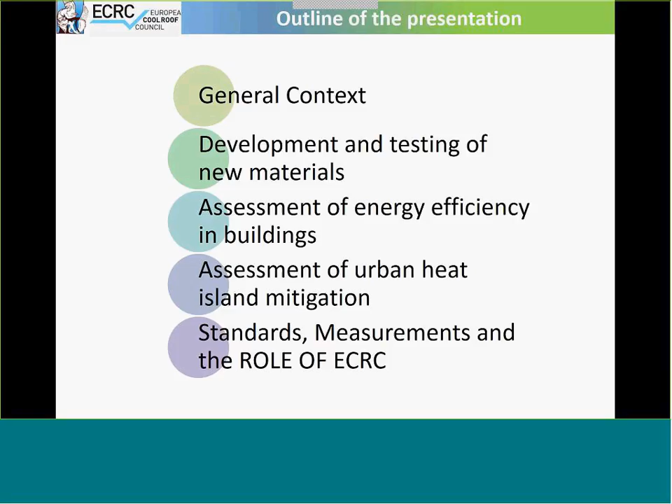So today's topic is an introduction to cool roofs and cool materials in Europe, and the role of the European Cool Roof Council. The outline of the presentation includes a general context, the development and testing of new materials, assessment of energy efficiency in buildings, assessment of urban heat island mitigation, standards and measurements, and how ECRC can contribute to that, which gives the floor also to Afroditi Synnefa, who is going to talk more on this.

In terms of the general context, according to the European Commission, buildings are responsible for 40% of the energy consumption and 36% of CO2 emissions in the European Union. By improving the energy efficiency in buildings, we could reduce the total EU energy consumption by 5 to 6% and lower CO2 emissions by about 5%, and this represents one of the major challenges for Europe today. Cool roofs can help the EU effectively address this.

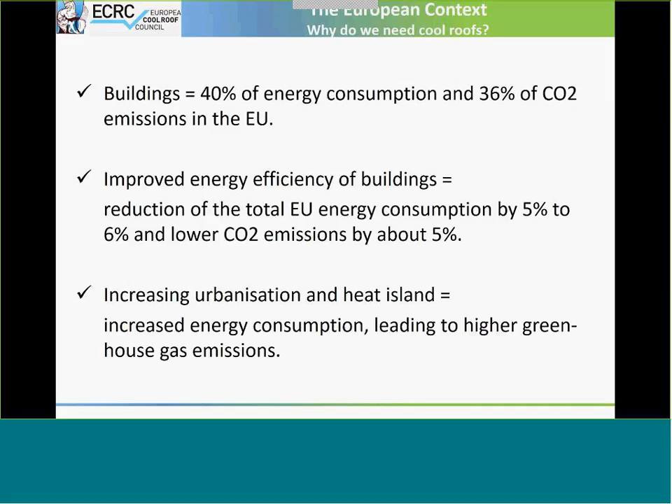We are also witnessing increased urbanization, the so-called urban heat island, which contributes to increased energy consumption, leading to higher greenhouse gas emissions and discomfort for Europeans. So what are the major challenges? Climate change patterns worldwide signal the imminent threat of climate change.

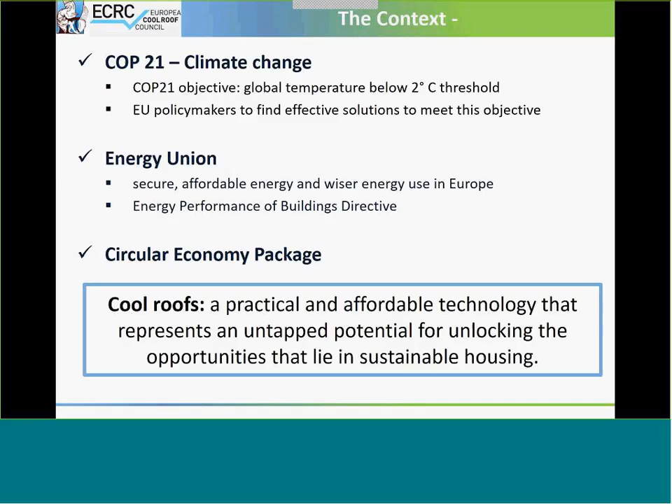In December 2015, leaders in Paris confirmed this by agreeing to take immediate action to prevent it, which is the COP21 objective of keeping global temperature well below the 2 degrees centigrade threshold. The European Union needs urgent and large-scale action to ease the low-carbon transition, and this can be supported by various EU legislative schemes such as the Energy Union and the circular economy, and cool roofs can be a practical and affordable technology that represents an untapped potential for unlocking opportunities in sustainable housing.

So what are the benefits of cool roofs? We would like to mention them again. They improve energy efficiency due to the reduction of building heat gain. They improve thermal comfort conditions in non-air conditioning buildings, and they improve the lifespan of materials. It's also a cost-effective solution that can be used in new and existing buildings.

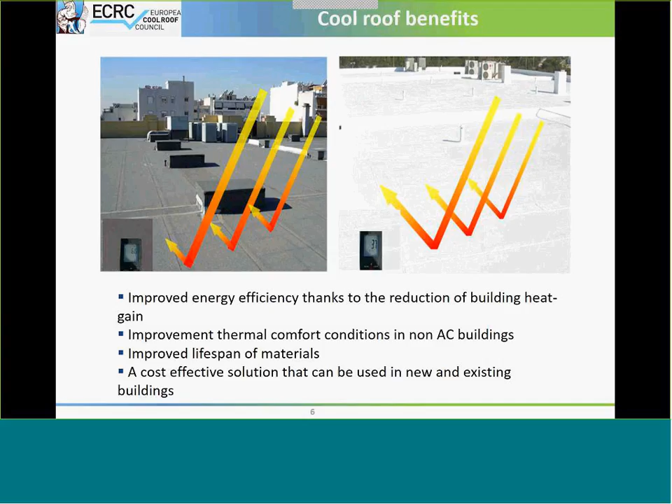Cool roofs can save over time on summertime air conditioning expenditures in conditioned buildings, and the air conditioning savings can be on average 10 to 40%, and they also contribute to the reduction of peak electricity demand and related financial savings.

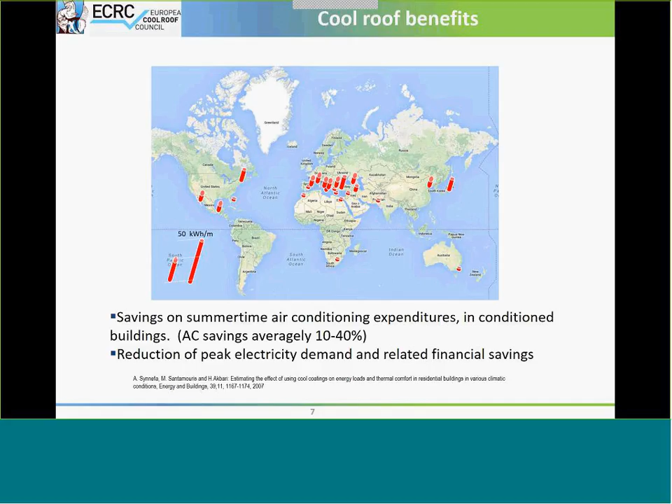Moreover, they improve the life expectancy of the roof system and reduce maintenance needs by reducing the thermal fatigue of the roof. We see here that for a reference building, the surface temperature fluctuates by 22 degrees, while for cool roofs the surface temperature fluctuates by 8 degrees.

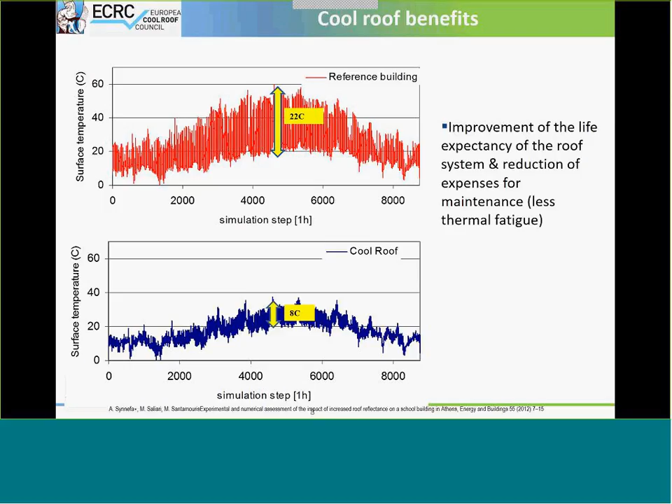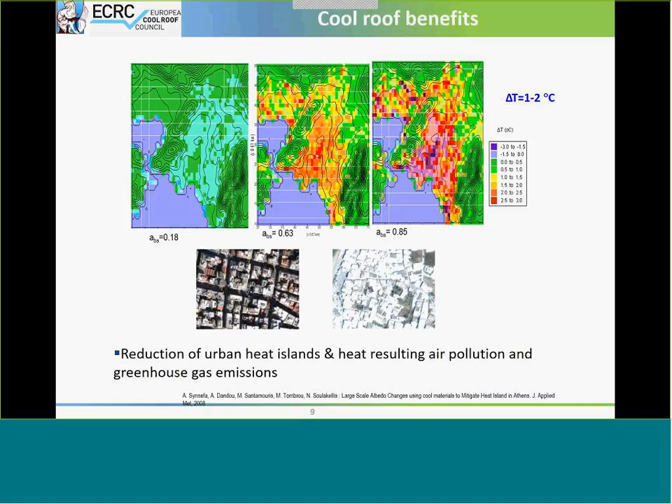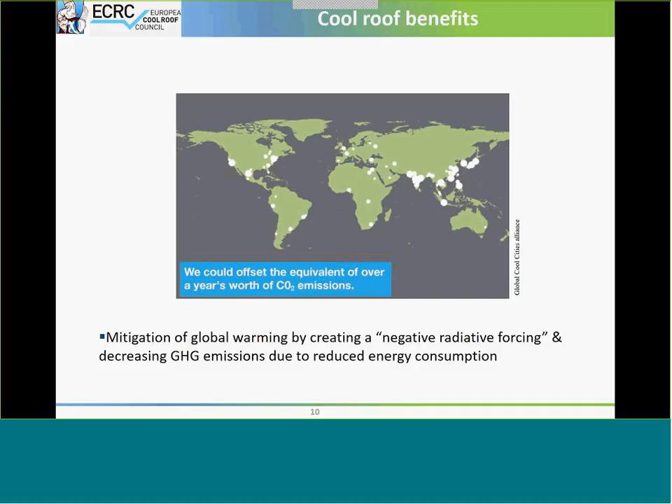Also, it contributes to the reduction of urban heat islands and heat-resulting air pollution and greenhouse gas emissions by minimizing the heat emitted by cities to the sky, and also mitigates global warming by creating a negative radiative forcing impact by decreasing greenhouse gas emissions due to reduced energy consumption.

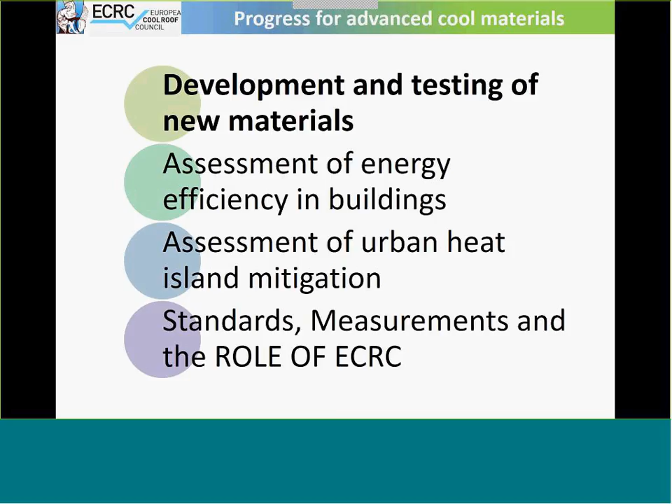So if we look at the progress for advanced cool materials, we have a development of new materials where significant effort is put into intelligent coatings and materials that provide a desired response to some external stimulus such as temperature, light, etc., and also into understanding the aging of such materials.

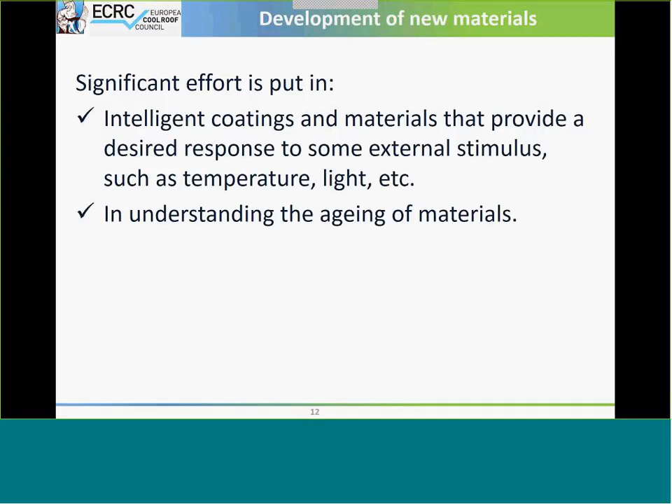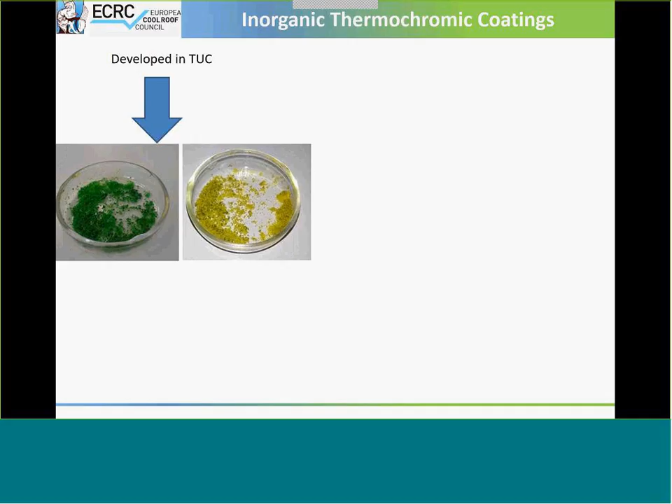We see here some thermochromic coatings developed at the Technical University of Crete, where it has the ability to change color based on the temperature. And we see here the transition temperature of these materials. This is the transition temperature, 45 degrees, which is very close to the surface temperature of cool roofs and cool materials.

And also we have thermochromic coatings with various filters, developed also by the Technical University of Crete. And we see some results of the aging of cool materials, where in existing applications we see in the bottom here.

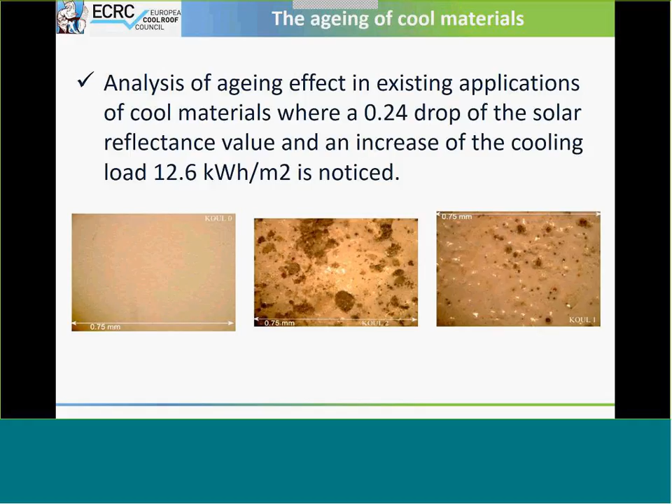We see the cool material as it exists in the initial application, while in the next two icons we see the cool materials after aging, and we measure that there is at least a 0.24 drop in the solar reflectance, and this contributes to an increase in the cooling load of 12.6 kilowatt-hours per square meter compared to the initial characterization of the cool materials. So we need to understand how these materials operate over time.

Also, we performed some microbiological analysis to see what kind of bacteria can be concentrated around the cool materials. And we see here the bacteria and fungi at 22 degrees for new and aged cool materials, respectively.

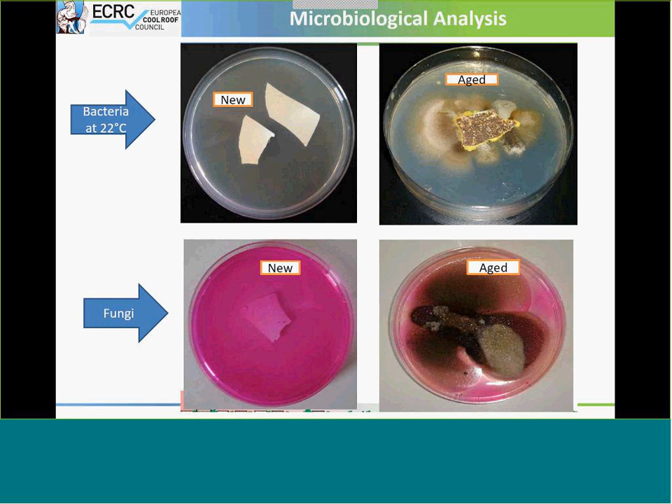So, about the assessment of energy efficiency in buildings, we have various applications around Europe showing that cool materials can contribute not only in southern Europe, which has hot climatic conditions, but also in temperate climates, for example in the Netherlands.

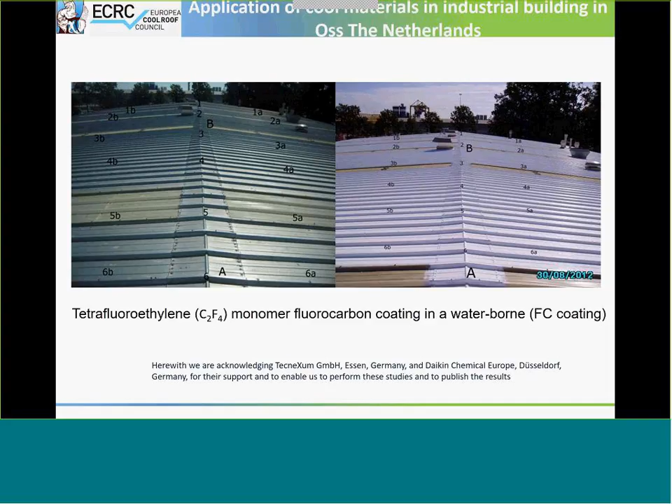We have here the application of a cool roof coating on a roof in an industrial building in Oss, Netherlands, where we see in two pictures the various points where we measured the surface temperature, and the instrument that we used to measure the solar reflectance and the albedo of the surface.

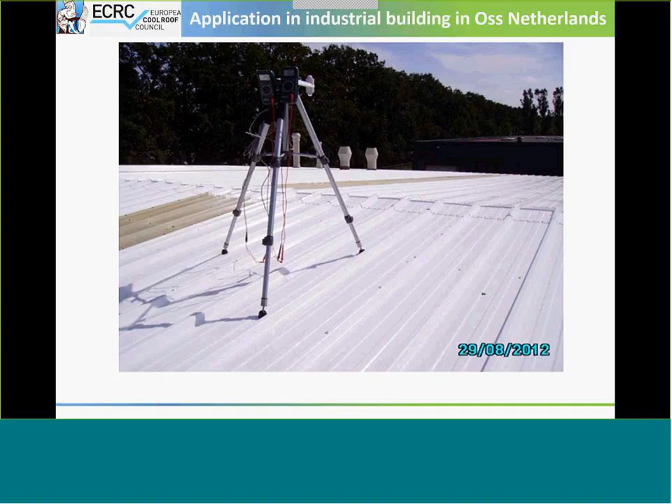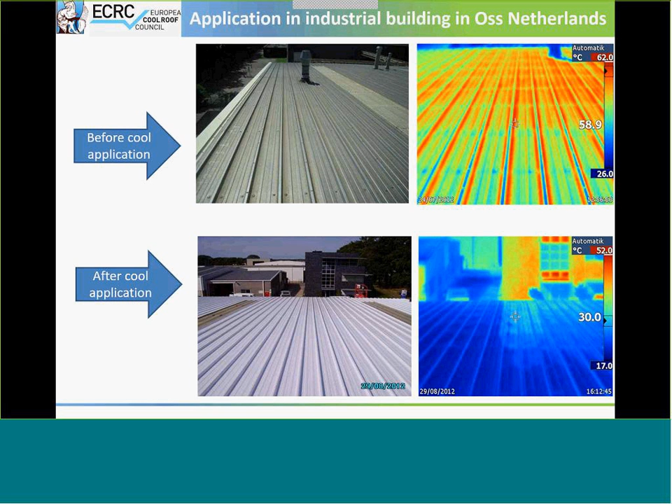Here we have the infrared images using a FLIR camera before and after cool roof application, where we see that the surface temperature of the roof can be at least 58 degrees before, while after the cool roof application, the surface temperature is 30 degrees. We have a significant reduction of the surface temperature of the roof.

So with this, we see an increase of 120% of the roof albedo by using cool roofs, and a decrease of 73% for cooling, while there is a minor heating penalty. This study shows that cool materials can be a viable solution for temperate climatic conditions and for industrial buildings, where there's usually a significant burden in the cooling load due to machinery and production lines. This application of cool materials can make a significant difference in the use of air conditioning, especially in mid-seasons.

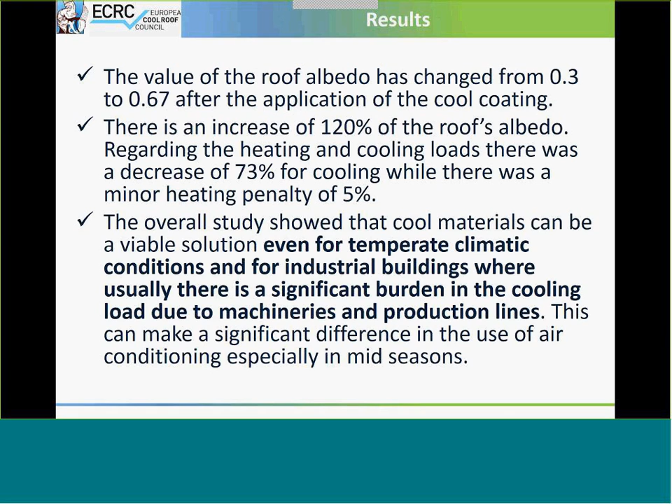Now, if we look at the assessment of urban heat island mitigation, there are various studies around Europe showing how cool materials or cool pavements can reduce urban heat. There are such applications in Serres, Florina, Agrinio, Archanes, Greece, and also a case study in the region of Nantes, France. In all case studies in various areas, we have a surface temperature decrease of around 5 degrees, and a contribution to a reduction of greenhouse gas emissions of almost 7 kilograms per square meter of cool materials.

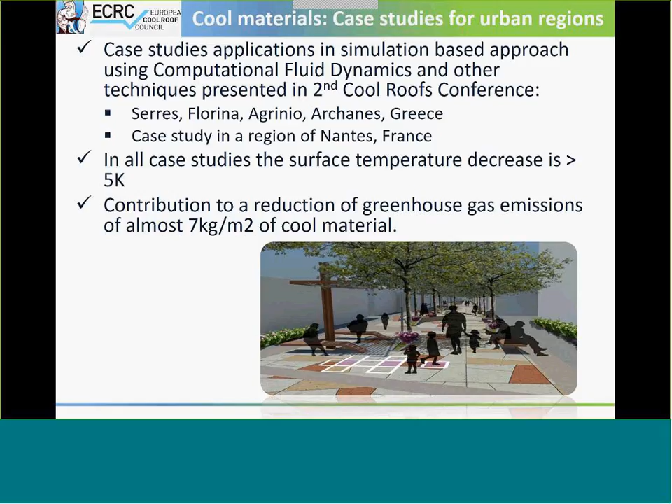We see here the difference in various points in the air temperature before and after cool roof application, where we have an air temperature difference of almost 1.5 to 2 degrees depending on the extent of application of cool materials.

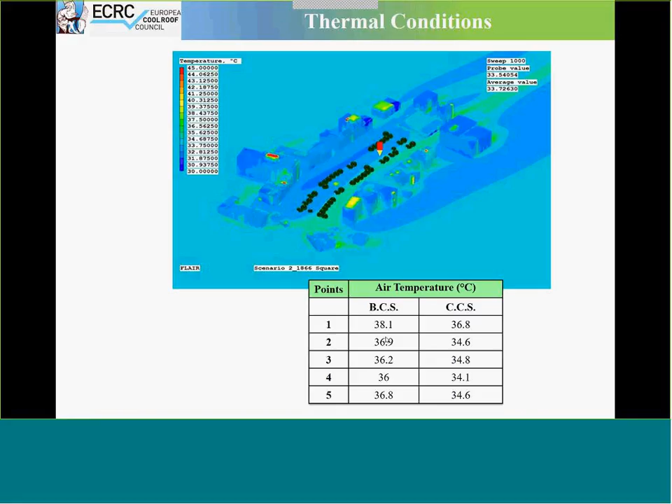Now, what is ECRC's role in this? ECRC was founded in 2011. We started our work in 2011-2012, and in 2014 we released a product rating scheme, a way of evaluating cool roof products.

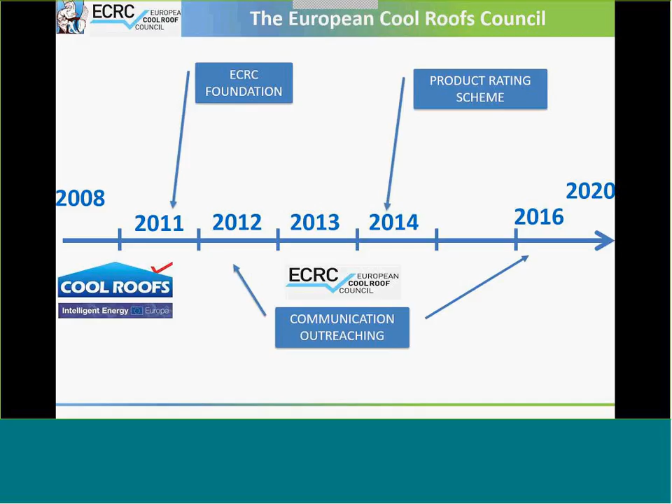This evaluates cool roof products versus their two main characteristics, which are solar reflectance and infrared emittance.

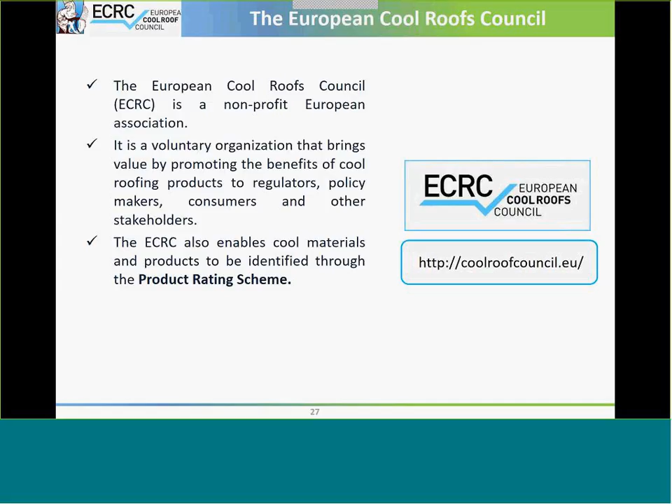So the European Cool Roof Council is a non-profit organization. It's a voluntary organization that brings value to its members by providing cool roof product information to regulators, policymakers, consumers, and other stakeholders, and provides this product rating scheme, which is going to be discussed further by Afroditi Synnefa.

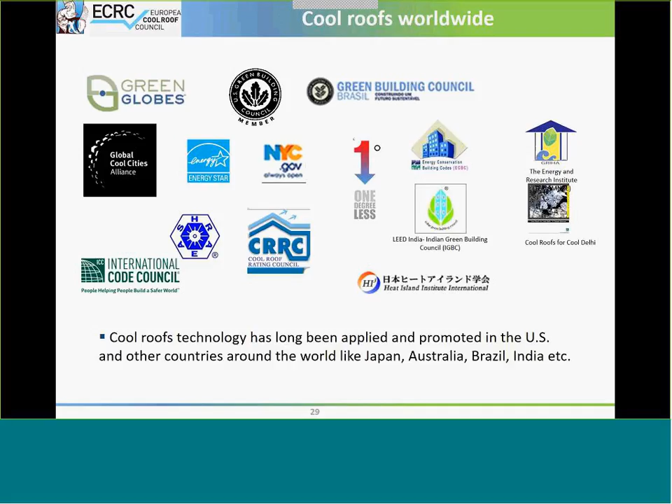There is a list of the current ECRC members. This provides a significant boost around Europe, but is also collaborating with other organizations worldwide, such as the US, Japan, Australia, Brazil, and India. We have three main objectives: to formulate this product rating program, which is already done; to include cool materials in European standards and energy assessment methods; and to promote the benefits of cool materials to stakeholders.

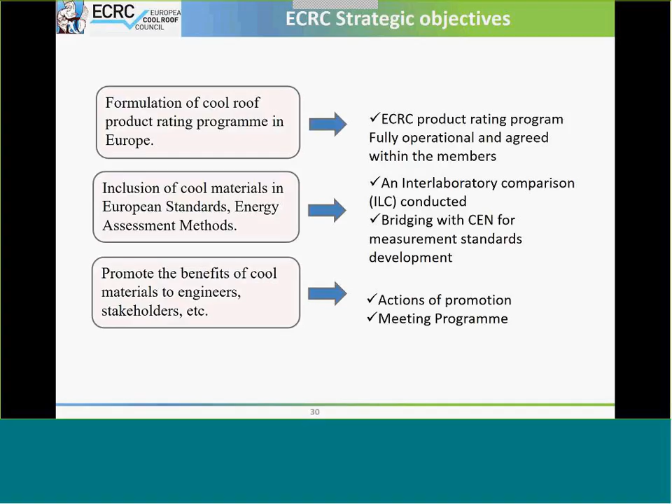So we created a uniform and credible system for rating and reporting these properties of roofing materials, which are the solar reflectance and infrared emittance, determined and verified through testing by European Cool Roof Council approved laboratories and a process of random testing of the various rated products among the various laboratories.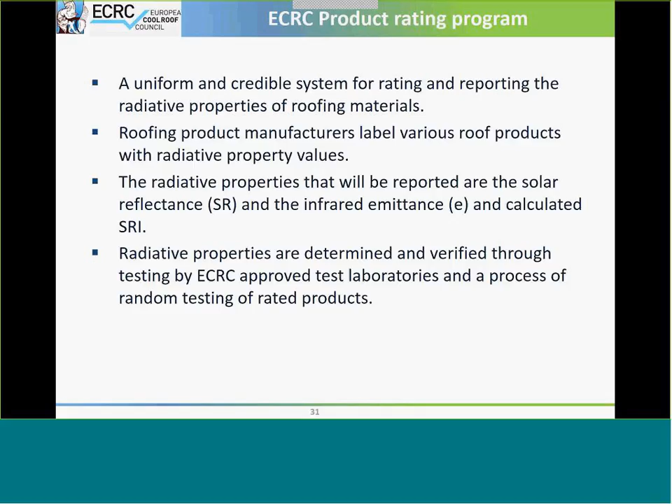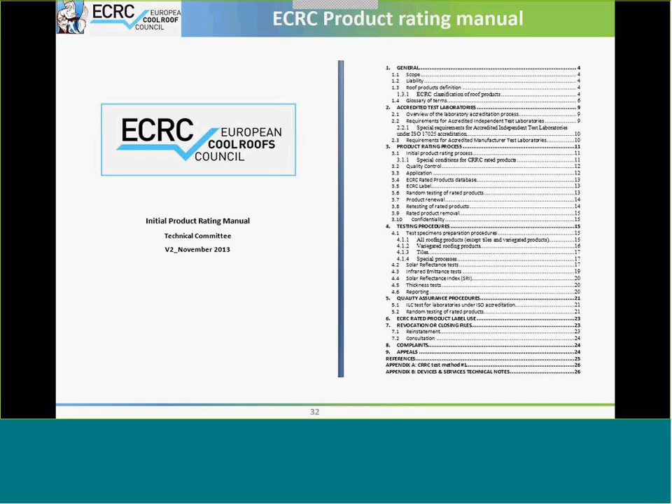This is an example of the first page of the product rating manual, which has also been updated now. There are some changes in the various texts, not significant changes, but there is continuous updating of this manual. We are also trying to perform work on weathering and aging of these cool materials.

by identifying the climatic conditions in Europe that can be representative for the application of cool materials. We have identified three different climatic regions representing the anticipated cool roof market in Europe: the Mediterranean, the center of Europe, and the temperate and oceanic climates, meaning the oceanic climatic zone of the UK and Atlantic region.

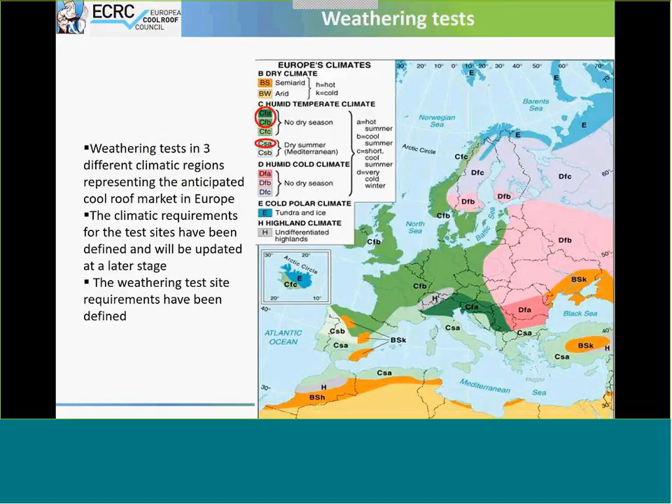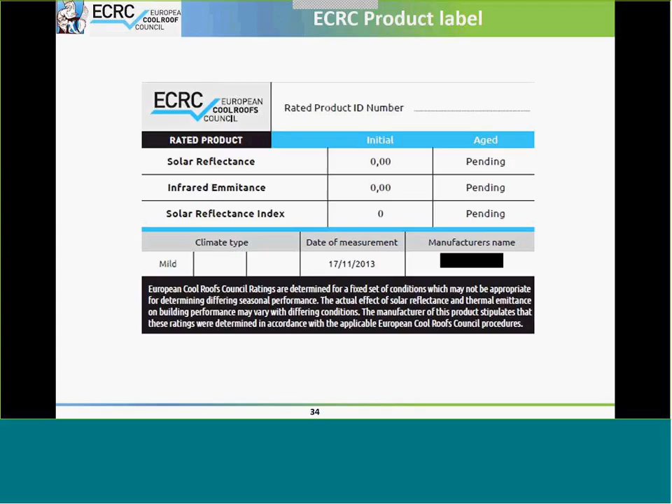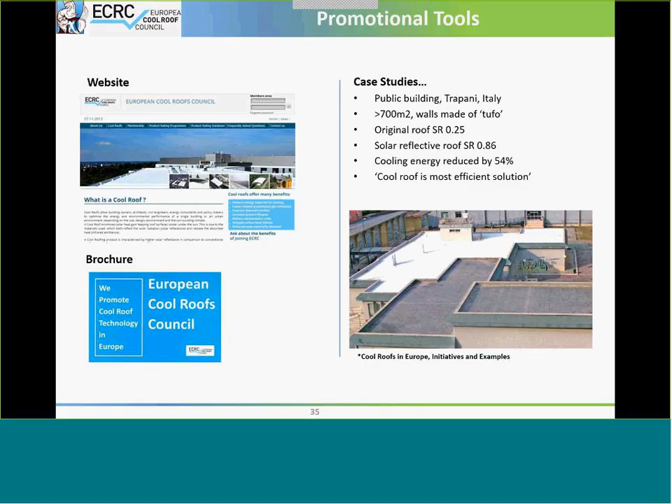You can see here how this product label looks, showing the initial solar reflectance, infrared emittance, and the solar reflectance index, both initial and aged, along with some promotional tools you can find through our website, the brochure, and some case studies that already exist apart from those presented here in this presentation. So thank you for your attention, and you can see here the web page.

I don't know if I was quick, and the floor is now back to Alexander, I hope.